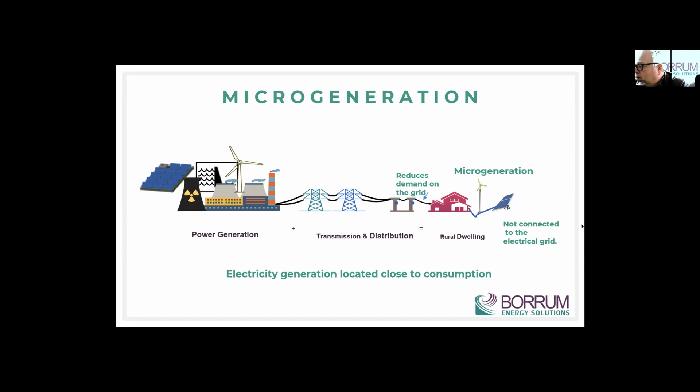Now, this microgeneration can be used for heating or electricity generation for dwellings. It can also be used, because it's portable, for small camps, or electronic equipment in a very remote setting that needs ongoing energy generation to support their operation. The next thing I would like to do here is give you a little video of this microgeneration turbine, and the one that we want to present is called the Anorra.

Well, it looks like we probably want to come back to the Anorra a little bit later on. So we're going to go right away to the challenges that any type of system faces in the Arctic, and I'd like to talk about that in more detail.

The top four, from our perspective, and there may be a few additional ones, are the temperature; the wind, steady wind, gust wind, and we're also going to include the icing in that category. The third one is the corrosive environment that's present in the Arctic. Lots of areas are close to the ocean or salt water, so the air would be salty and create a corrosive environment. And finally, the logistics of bringing a microgeneration turbine to the point of electrical consumption, as well as its installation. So let's start with the temperature.

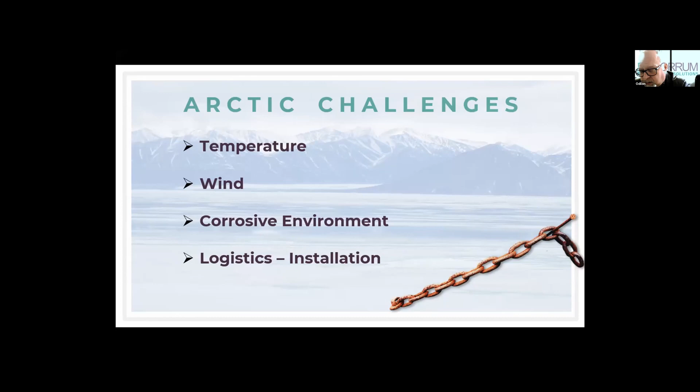So the turbine design integrated, to start with, very low temperature requirements. And I'm pleased to say that our turbine has been tested independently and very successfully to minus 50 C, which covers most of the areas in the Arctic and subarctic.

The blades, our carbon fiber, are not affected by temperature. And furthermore, we have no mechanical system on the turbine and the tower that can be negatively affected by the temperature. I'd also like to point out that we have no electronics on the turbine. The reason for that is electronics, circuit boards, don't do very well in cold temperature.

Furthermore, it's clear that if a circuit board breaks down in the middle of a remote location in the Arctic or subarctic, it's difficult to find somebody to fix it or troubleshoot it. So in order to improve reliability and availability of the system and ease of maintenance and repair, we eliminated all electronics on the turbine itself.

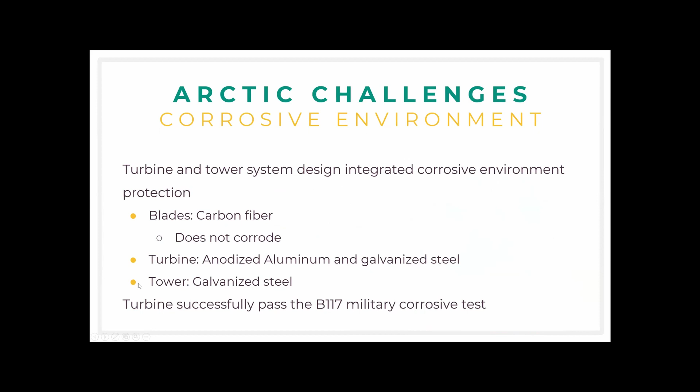Thank you. All right, so we've talked about the temperature. So the next, if we can move, thank you. We're going to talk about the next challenge that we dealt with. The next challenge is the corrosive environment that's present in the Arctic and subarctic. So we've integrated protection against corrosion within the design.

Obviously, the blades are carbon fiber, which doesn't corrode. The turbine itself is made of anodized aluminum and galvanized steel. The tower itself is all made of galvanized steel. To validate that our design can support anti-corrosion for at least 20 years, we submitted the turbine to the B117 standard anti-corrosion test that's used a lot by the military, and I have to say it was very, very successful. So from a corrosion environment, this turbine is good for a minimum of 20 years.

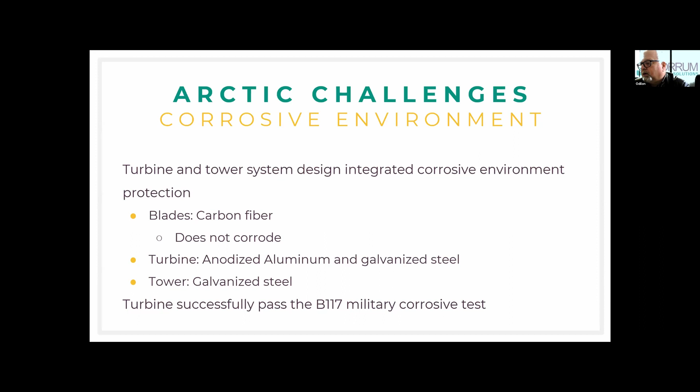If we want to move to the wind, well, here's the thing about the wind. There's steady wind, there's gust wind, and there's icing that we have to consider. So the first thing that we want to look at is that the blade structures have been tested independently to withstand 190 kilometers an hour, which is about 118 miles per hour, steady wind.

And I have to say, even at that type of wind, the wind applies a lot of pressure on the blade structure. The blades did not break. And in fact, the blades returned to their initial shape once that pressure was removed. The tower structure itself meets, if not exceeds, the same standard.

So in terms of gust wind, and I think here the technical problem is that this is a previous set of slides, so there's a few things missing, but we'll make sure that we provide the updated presentation. But at the end of the day, the tower structure and the turbine can support and will support gust wind of up to 120 miles per hour.

If we want to go back one more, the other thing is it will withstand icing, and icing here needs to be considered not only on the blades, but also on the guy wires for the turbine. So the blades themselves are painted black, so they can absorb the energy from the sun when it's sunny, and we also put a compound on them to help reduce the chance of icing.

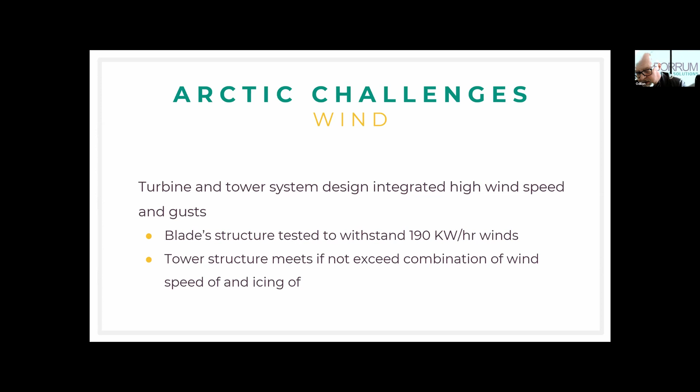The last thing I want to say, and I know for sure here that this is an old slide. We had nice pictures that deal with Alaska, but basically the tower system and the whole system is shipped in modules. And the way it's done is the turbine and the tower are assembled horizontally. That can be done with the common tools found in the house.

And the tower is a tilt tower with guy wires. And the tower, once assembled horizontally, can be raised vertically by numerous types of vehicles that are easily available in the Arctic region: snowmobiles, ATVs, track vehicles, pickup trucks, and we also have a configuration where one can use a manual winch.

The reason this is feasible, one of the reasons, is the turbine is fairly lightweight since we maximize the use of aluminum for the turbine itself. And so it's really light compared to others, and that eases raising the turbine vertically. It works the other way around.

The system is portable. So if this is a setup where the point of electrical energy consumption needs to move, like a camp or research instrumentation or whatever, the tower can be brought down horizontally, dismantled, put back in the shipment containers, and brought to the next site where it can go up the same way.

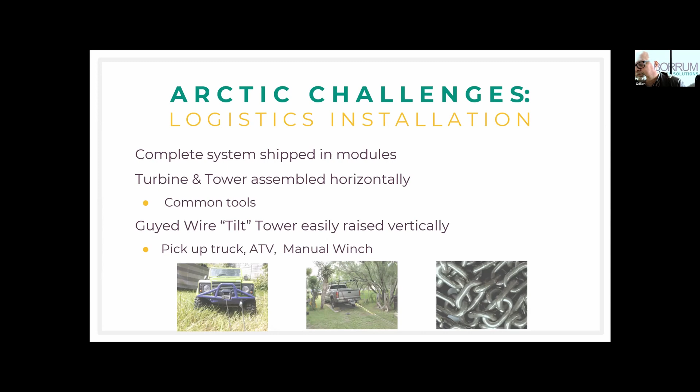Now, this furling system has no springs, no coils, nothing that will break, nothing that will fatigue over time. And not to reveal the secret sauce, but it basically relies on gravity to work very well. And as one of our engineers said, if we lose gravity, we have a bigger problem, not just the turbine.

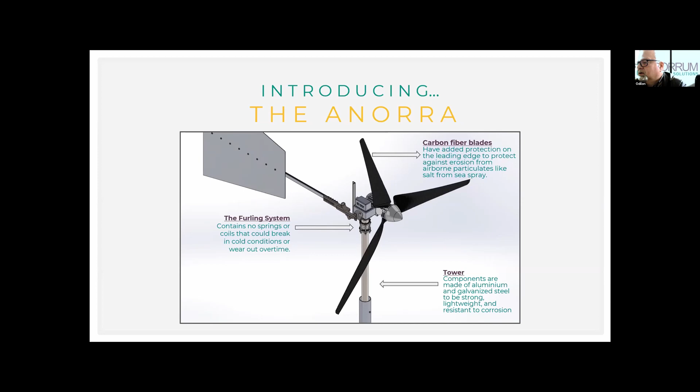The generator behind it and the nacelle is all anodized aluminum. So is the hubcap here, the cone, and you can see the carbon fiber blades on this diagram. So that's a bit the structure of the Anorra.

If we look at the summary of the challenges, if we go to the next slide, thank you. So what we have hopefully covered is that our turbine is designed and tested to address some of the big challenges in the Arctic: temperature, -50, wind up to 120 miles per hour, corrosive environment, logistics, and installation.

What I'd like to also point out today is we are a research and design organization, so we make sure we meet various standards, whether it is on antennas, building code, electrical code, as well as, for example, the IEC international standard. It's called the 61400-2. I'll spare you the details, but it's an international standard on small wind turbines or microgeneration wind turbines that we adhere to.

So our business model, anyone can order one of our turbines on the internet, it's available. But we are also looking for distributors that can be resellers or value-added resellers in the Northern Hemisphere. So at the end of the day, the Anorra is basically a premium, affordable microgeneration wind turbine. We kind of borrow the IKEA model, some assembly required by the end customer.

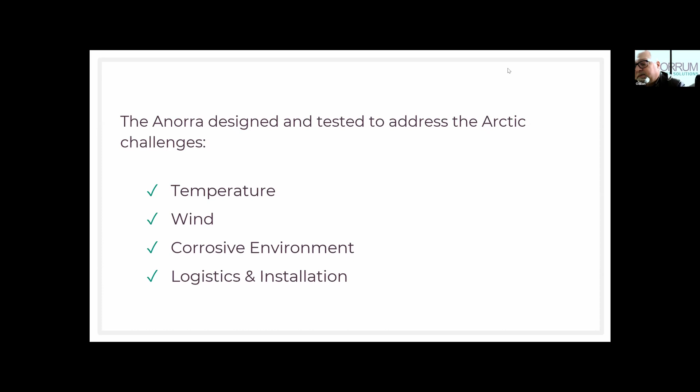Great. Thank you so much, Mr. Lemieux, for that very technical perspective, as well as an example of a business that has transformed challenges in the Arctic into solutions and into an opportunity. So thank you so much.